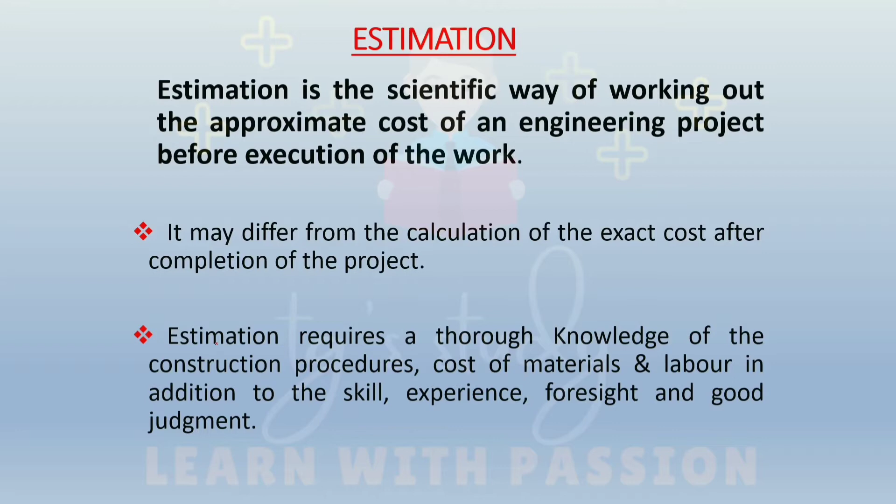There are some points of estimate. So what is an estimate? An estimate of the cost of a construction job is the probable cost of that job as computed from plans and specifications. Next point, for a good estimate, the actual cost of the proposed work after completion should not differ by more than 5 to 10% from its approximate cost estimate. So we have to know that the estimated cost should not exceed 5 to 10%.

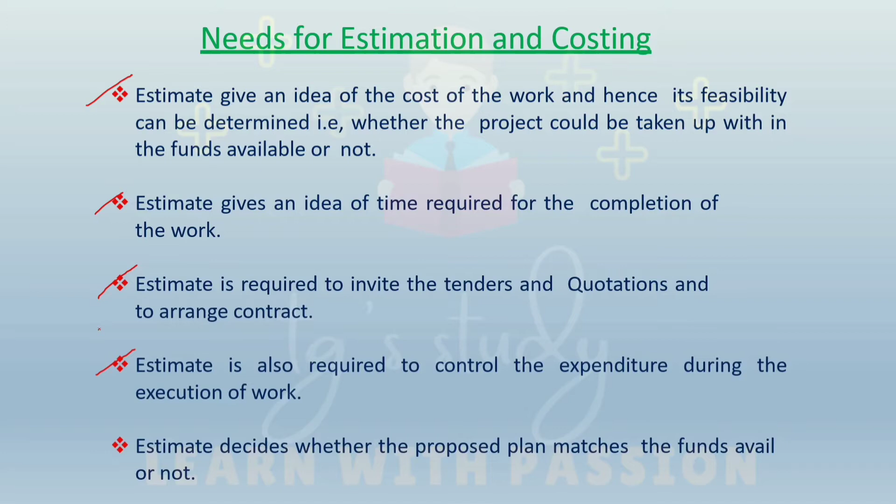Okay. Next, there are some needs for estimation and costing. First, an estimate gives an idea of the cost of the work and hence its feasibility can be determined, that is, whether the project could be taken up within the funds available or not. Next point, an estimate gives an idea of the time required for the completion of the work. Third point, an estimate is required to invite tenders and quotations and to arrange contracts. Fourth point, an estimate is also required to control the expenditure during the execution of work. And last, an estimate decides whether the proposed plan matches the funds available or not. Next,

there are some factors to be considered for estimation. First point, each type of work requires a different method of construction. Construction may be of an ordinary house or office, and it may also be of a dam, tunnel, multi-story buildings, airport, bridge or a road. Each of these works requires totally different construction techniques, type of machinery and formwork. Second point, quality of labor and labor output varies in different localities. Third point, weather conditions greatly affect the output and hence the overall cost.

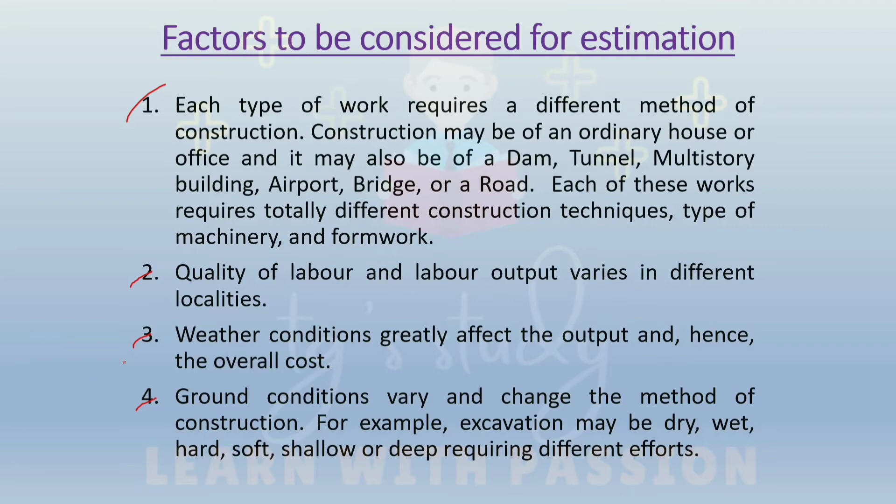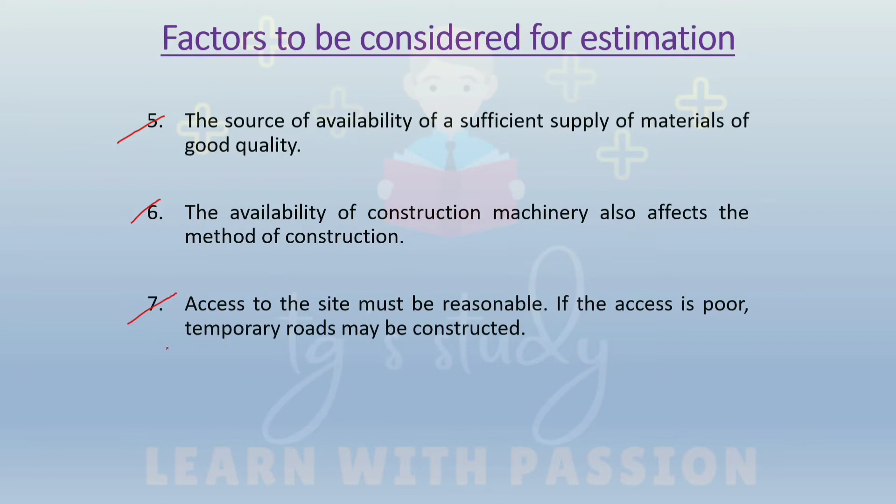Fourth point, ground conditions vary and change the method of construction. For example, excavation may be dry, wet, hard, soft, shallow or deep, requiring different efforts. Fifth point, the source of availability of a sufficient supply of material of good quality. Sixth point, the availability of construction machinery also affects the method of construction. And last point, access to the site must be reasonable. If the access is poor, temporary roads may be constructed. Okay, so these are some factors that may be considered while estimating. Okay. Next,

essential qualities of a good estimator. So first point, in preparing an estimate, the estimator must have good knowledge regarding the important rules of quantity surveying. Second point, he must thoroughly understand the drawings of the structure for which he is going to prepare an estimate. Third point, he must also be clearly informed about the specifications showing the nature and classes of works and the materials to be used, because the rates at which various types of works can be executed depend upon its specification.

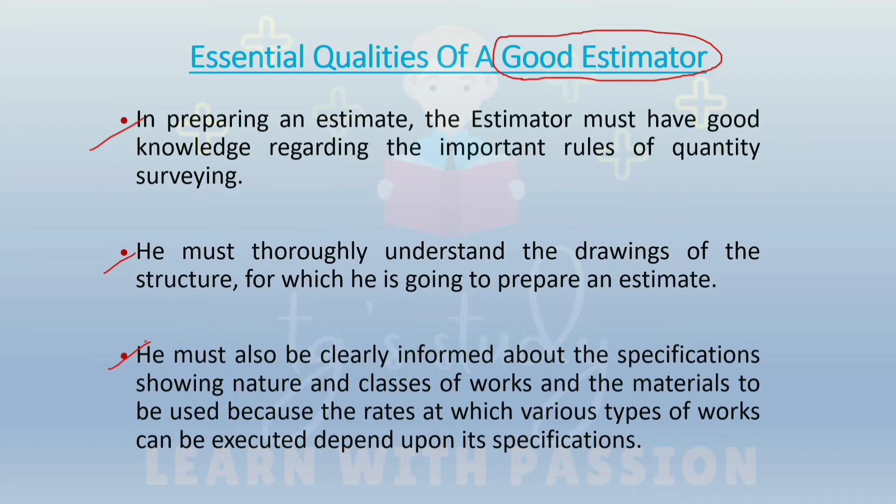Next point, before preparing the estimate, the estimator should visit the site and make a study of conditions. Next point, note the location of the proposed building. Next, get all data available regarding the soil. Next, make a sketch of the site showing all important details. And last point, obtain information concerning light, power and water. So understand what the qualities of a good estimator are. Clear? Next,

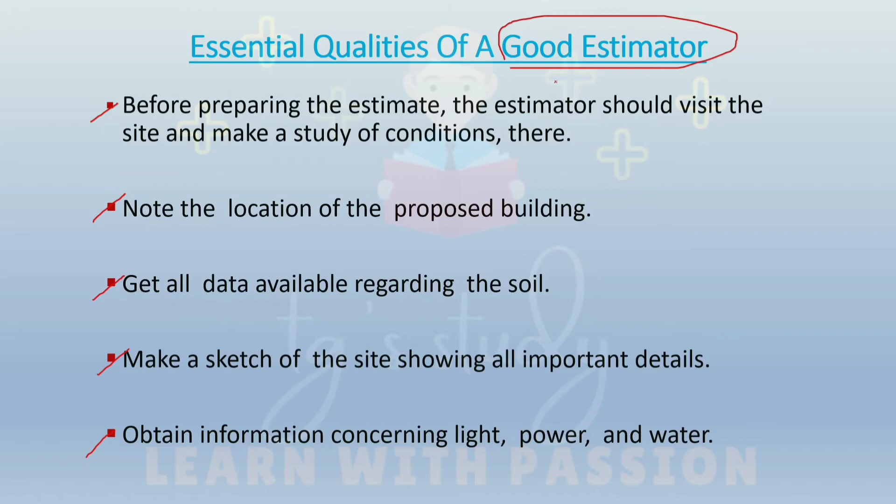some data required to prepare an estimate. There are mainly three important data. First, drawings, that is plan, elevation and sections. Second, specification, and third, rates. I will describe these three data briefly in my next slide. So, at first, drawings.

If the drawings are not clear and without complete dimensions, the preparation of estimations becomes very difficult. So it is very essential before preparing an estimate. Second data, specification. It may be of two types. First, general specification. This gives the nature and quality of work and materials in general terms to be used in various parts of work. It helps to form a general idea of the building.

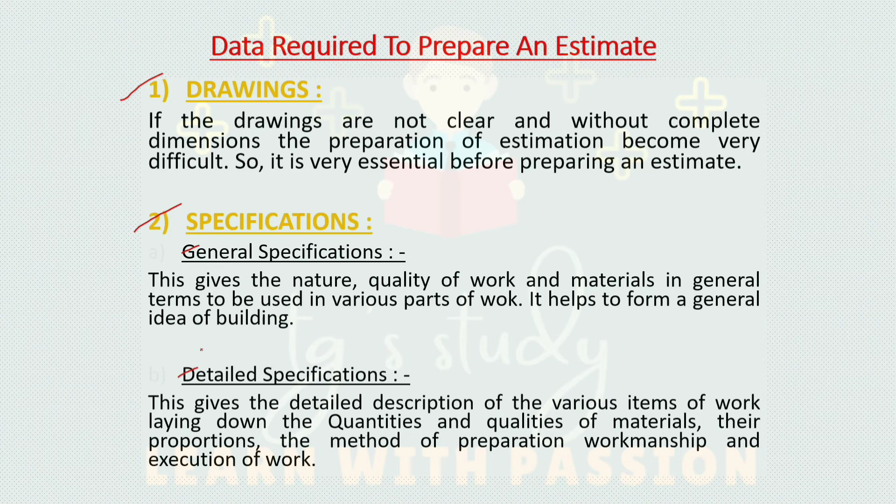Second, detailed specification. This gives the detailed description of the various items of work, laying down the quantities and qualities of materials, their proportions, the method of preparation, workmanship and execution of work. And third data, that is rates. For preparing the estimate, the unit rates of each item of work are required.

First point, for arriving at the unit rates of each item. Second, the rates of various materials to be used in the construction. Third, the cost of transport of materials. And fourth, the wages of labor, skilled or unskilled, of masons, carpenters, etc. Next slide.

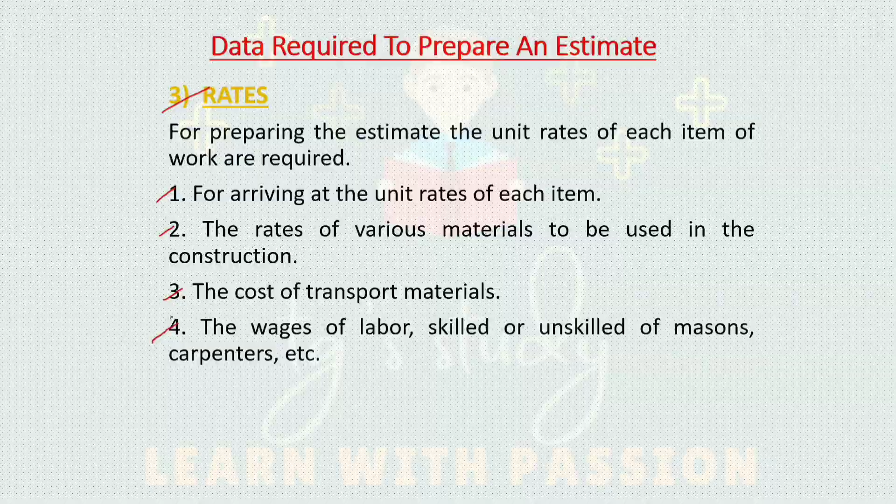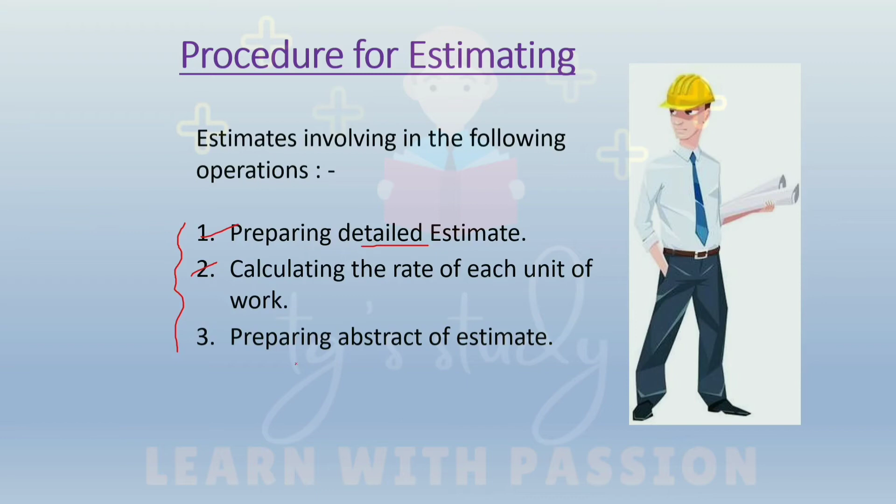Procedure for estimating. There are three main procedures. First, preparing a detailed estimate. Next, calculate the rate of each unit of work. And last, preparing an abstract of estimate. Next slide.

Measurement of materials and works. The units of measurement are mainly categorized by their nature, shape, size and for making payments to the contractor. Single unit works like doors, windows, etc. are expressed in numbers. Clear? Next point, works consisting of linear measurement involving length, like cornice, fencing, handrail, etc. are expressed in running meter or RM.

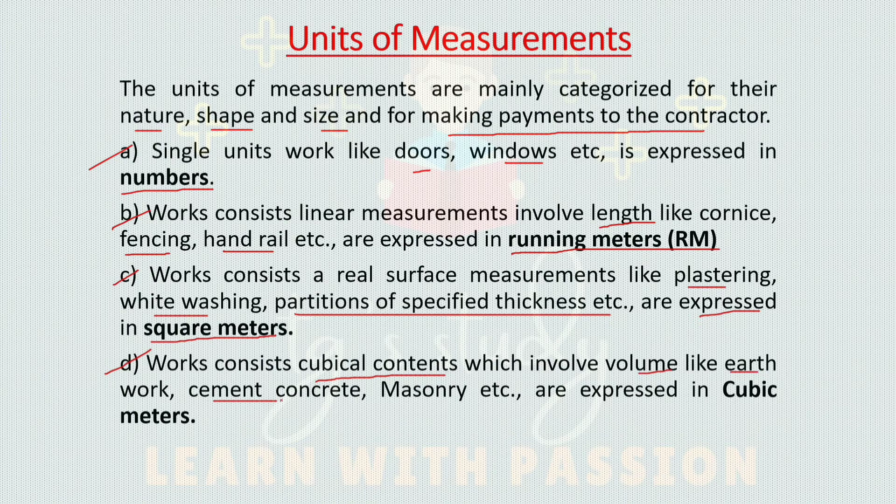Third, works consisting of areal surface measurement, like plastering, whitewashing, partitions of specified thickness, etc. are expressed in square meter. Clear? Last, works consisting of cubical contents which involve volume, like earthwork, cement concrete, masonry, etc. are expressed in cubic meter. Okay, clear?

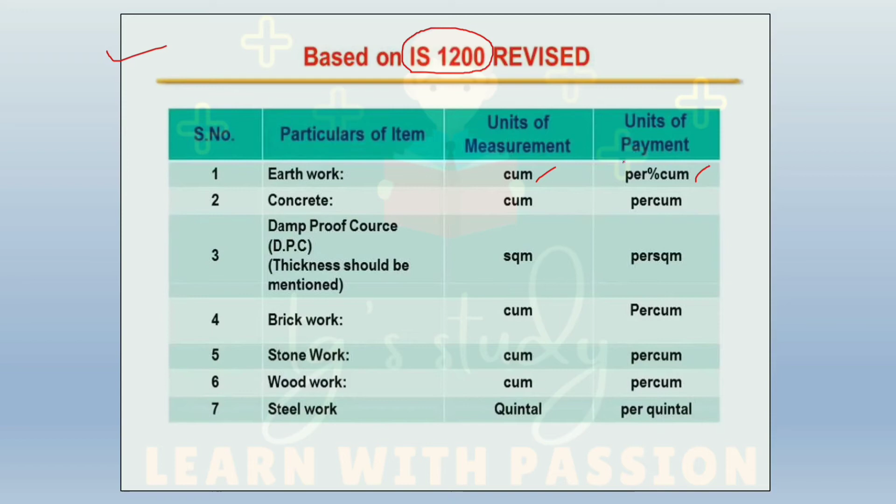Next, the list is given from IS 1200. Clear? So there are some items of work, that is earthwork. The unit is cubic meter and the rate of estimate is per percentage cubic meter. It means the rate may be multiplied with the certain value of payment by 100. Clear? Next, concrete. The measurement unit is cubic meter.

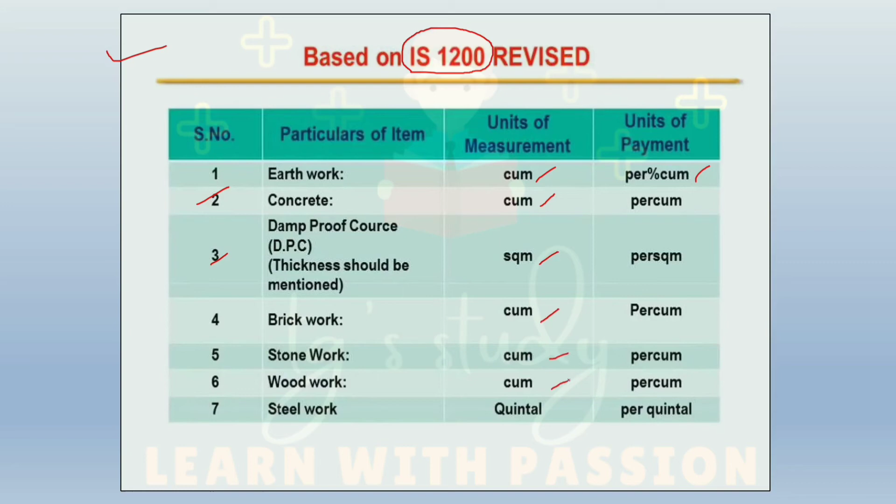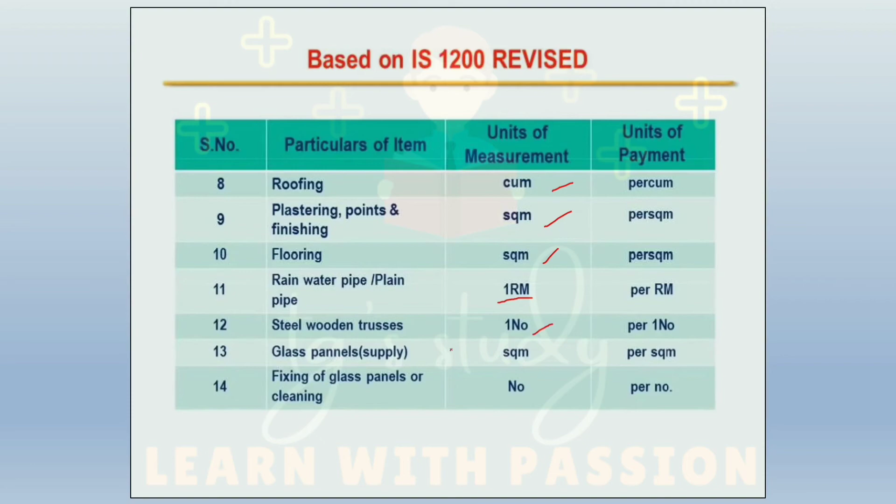Next, damp proof course. The unit is square meter. Brickwork is cubic meter. Stonework cubic meter. Woodwork cubic meter. Steelwork quintal. Next, roofing is cubic meter. Plastering, pointing, finishing, flooring is square meter. Rainwater pipe or plain pipe, that is running meter. Okay. Steel or wooden truss, that is in number, and so on. Next slide.

Rules for measurement. The rules for measurement of each item are invariably described in IS 1200. This is the code for measurement. Clear? IS 1200. However, some of the general rules are listed below. First, measurement shall be made for the finished item of work, and descriptions of each item shall include material, transport, labor, fabrication, tools and plants, and all types of overheads for finishing the work in required shape, size and specification.

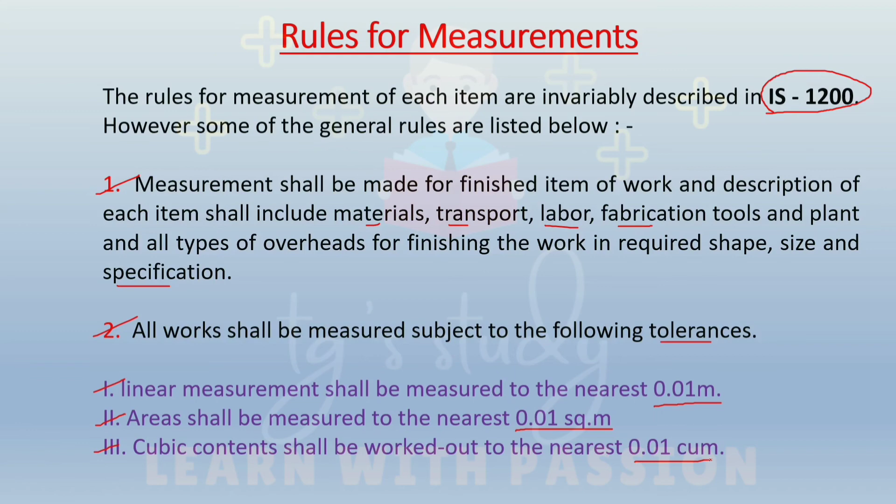Second, all works shall be measured subject to the following tolerance. It means the linear measurement, that is the length, width or height value, shall be measured to the nearest 0.01 meter. Areas shall be measured to the nearest 0.01 square meter. Cubic contents shall be worked out to the nearest 0.01 cubic meter. This is our tolerance value.

Okay. Next, third point, the same type of work under different conditions and natures shall be measured separately under separate items. The bill of quantities shall fully describe the materials, proportion, workmanship and accurately represent the work to be executed. Fifth point, in case of masonry, it may be stone or brick or structural concrete. The categories shall be measured separately and the heights shall be described.

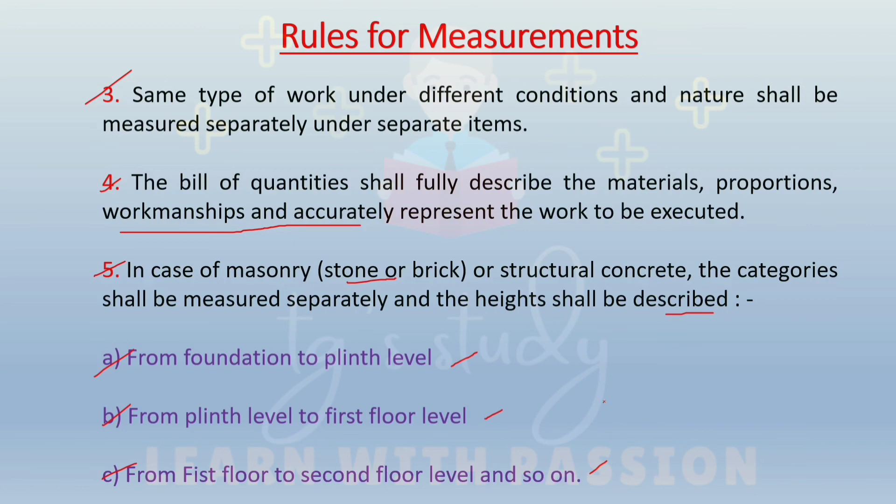It means from foundation to plinth level, the height should be measured. From plinth level to the first floor, and last from first floor to second floor, and so on. So this is the overview part of estimating and costing. I think this is clear to you.